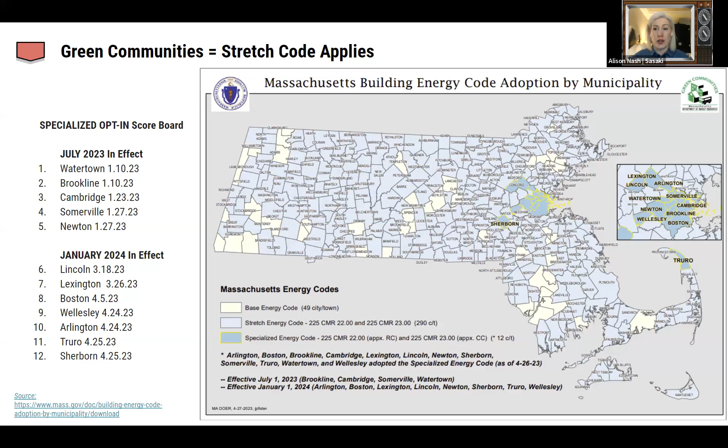However, it is important to know that the stretch code, the basic stretch code, does apply automatically across most of Massachusetts. There are only 49 municipalities or towns that are not green communities in the state. So really, it's important to note that the stretch code in its new form really applies to almost every type of project in Massachusetts, which is different than before.

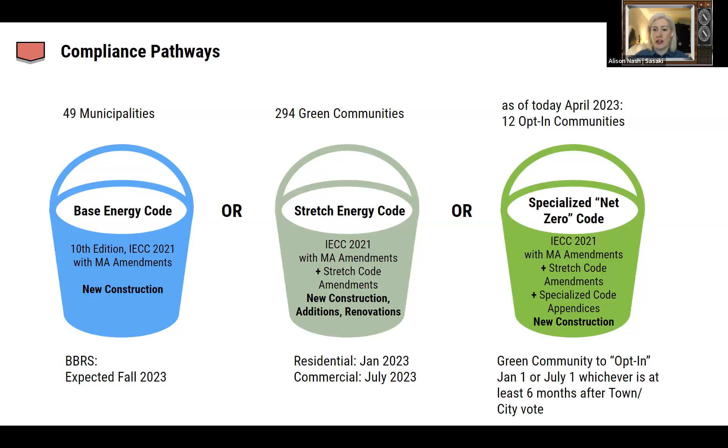And how does this work? So the base energy code, we're expecting the BBRS to implement that in the fall. We're still waiting on that final date of when that will be. The base energy code and the 10th edition will be released. However, that energy code really only applies to the 49 municipalities that are not green communities. The rest of the state will either follow the stretch energy code or they'll have the overlay of the opt-in code in addition to the stretch code requirements.

And this is just another way to look at it. We have the IECC 2021, which served as the model code. The base code is adopted from that, and then there's some Massachusetts amendments that'll be coming out as part of that. However, most of the state is going to follow the base and stretch code, with those 12 communities, and we anticipate more having to follow the opt-in code.

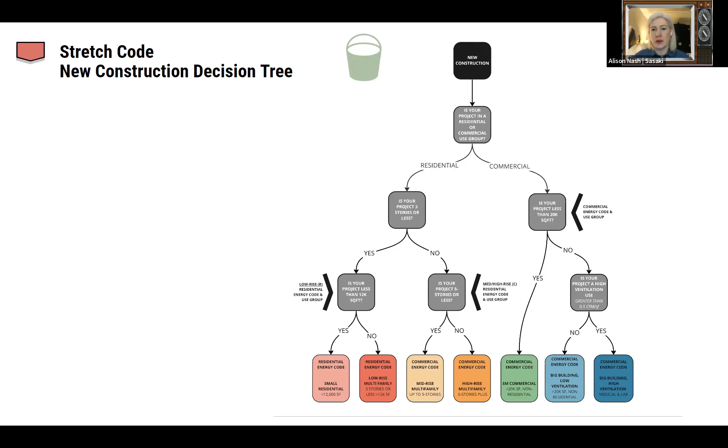So how do we know what this applies to? We've used this decision tree that was put together by a few of the Boston area sustainable design leaders, and it really helps you understand, if you're a residential or commercial project, how does that apply?

For the TEDI pathway, which we'll go into in more detail later, it applies to specific use types of buildings. So if your energy use type is a dormitory, fire station, library, office, school, police station, post office, or town hall, TEDI is a pathway you can use. There are other pathways too, but TEDI is a strong pathway for these particular use types, and it's optional for other use types.

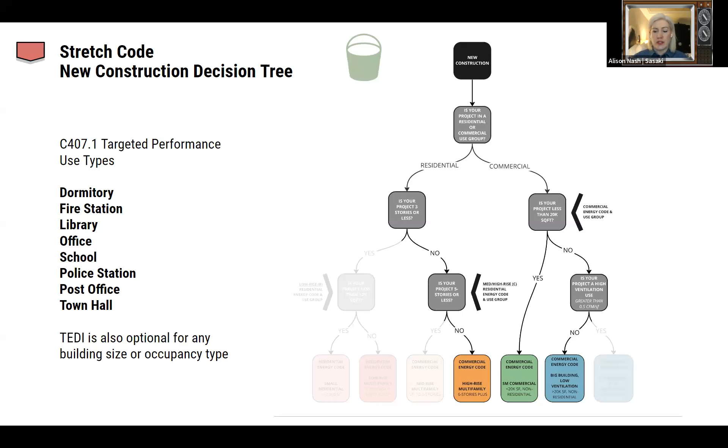So diving into the timeline and when this applies, and a little bit of background. The technical guidance documents were released last December. In January, the residential stretch code became effect, and that's when some towns and cities started voting. Brookline, Cambridge, Somerville, and Watertown adopted the opt-in specialized code quickly, and we now have an additional 8 cities and towns where the opt-in code will be in effect in January 2024.

This summer, the commercial stretch code will be in effect. We have a talk on that later this summer. We also anticipate that the base energy code is going to happen in July or the fall. In January next year, the opt-in stretch code multifamily for less than 5 stories will be required to meet passive house.

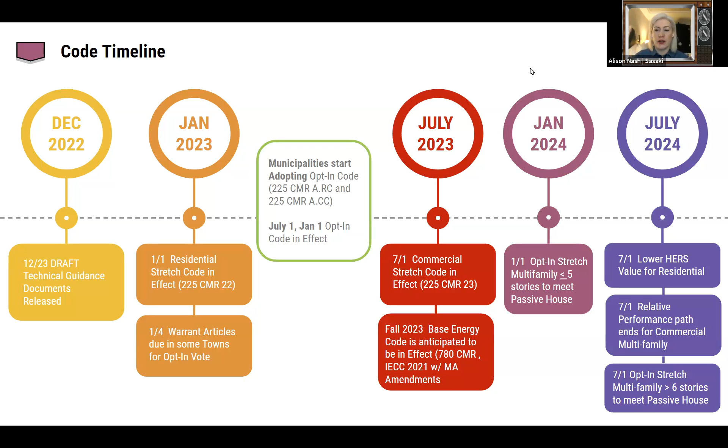And in July next year, there'll be a lower HERS value required for residential. The relative performance path will end for commercial multifamily, and the opt-in specialized code for multifamily greater than 6 stories will be required to meet passive house.

So in Massachusetts, decarbonization is now law. The recently adopted stretch energy code and specialized opt-in code take a leap forward in decarbonizing the built environment. And we see this through the introduction of some new metrics for building performance.

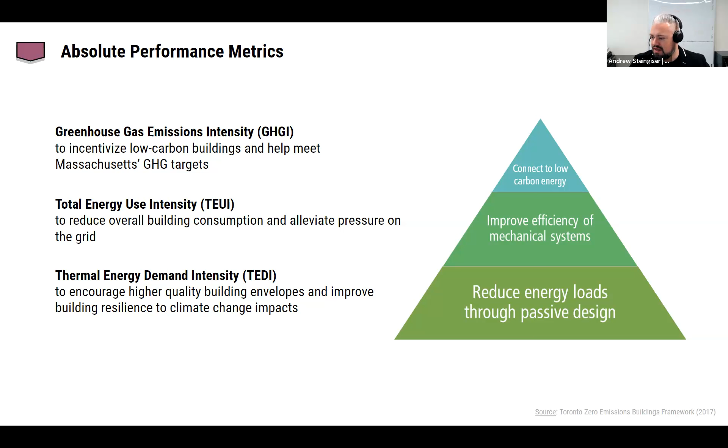So the code is moving towards absolute metrics rather than percent-better-than approaches like we've seen in the past. Through enclosure improvements like those required by TEDI, we reduce energy loads and mechanical loads. With reduced mechanical loads, we can reduce the size and energy use of mechanical systems, therefore lowering the total EUI and operational greenhouse gas emissions. Then we can lower the greenhouse gas emissions of the building, requiring less renewable resources to offset the remaining greenhouse gas emissions. So now the code is moving towards these absolute metrics, some of which include passive house and TEDI.

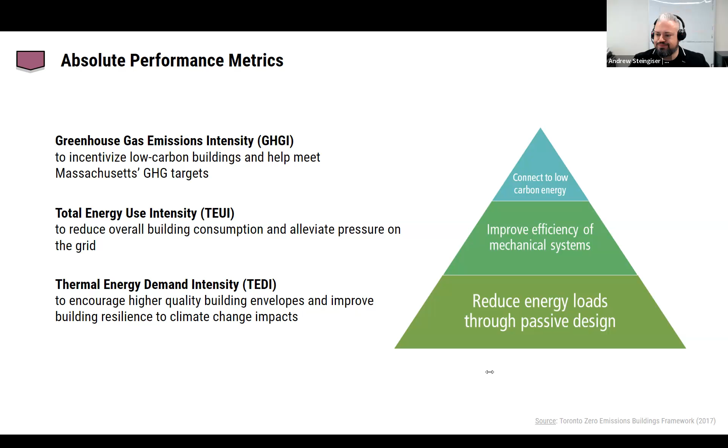So all the code paths are looking more at whole building performance now. We're all familiar, well a lot of us are familiar, with passive house at this point. Passive House is a compliance path for all buildings. Other paths in the code implement various elements of Passive House through multiple code requirements in different sections. This includes things like building enclosure improvements, air tightness, and heat recovery ventilation.

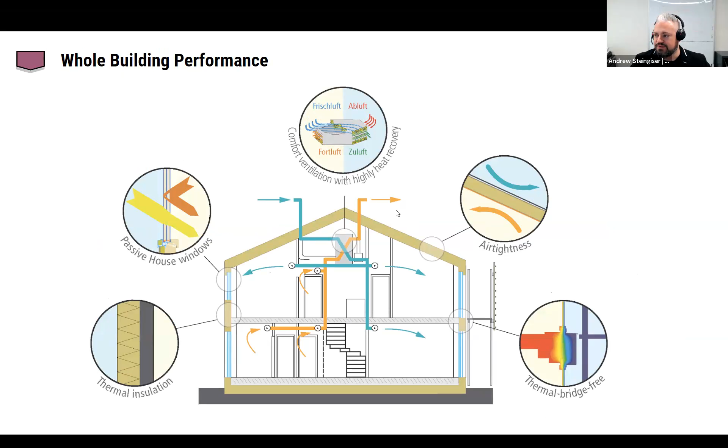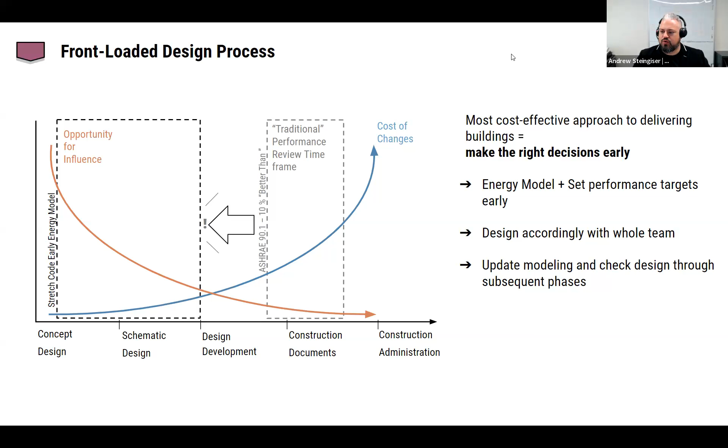So what this does for us with some of these new code requirements is it really shifts the design process. We have to make the right decisions early in the process. The new code requires early phase energy modeling right up front to set design targets that then are followed through and verified throughout the design process.

Versus the traditional time frame where we design the building, take it through somewhere in DD, there's an hourly energy model to check if it's 10% better than ASHRAE 90.1. This is how we did it in the past, and then usually it worked and we proceed through permitting. Now, with the metrics in the code that are there, it really relies on hitting these set targets. So you want to know upfront if you're hitting that target, and then what modifications need to be made in order to hit that target right out of the gate.

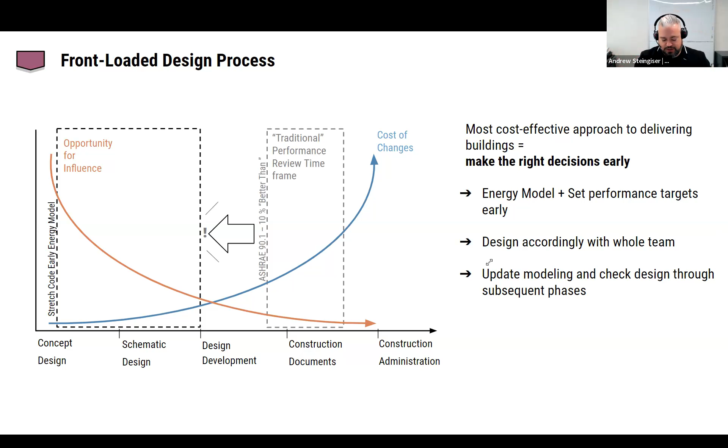So we're going to start talking a little bit more about the compliance paths in TEDI. There are essentially 4 compliance paths in the commercial code. Today we're just talking about commercial, so that's commercial buildings and residential buildings over 3 stories. There's a prescriptive path, which is 20,000 square feet, and it's what it sounds like—prescriptive components for envelope and mechanical, electrical, hot water, solar ready, EV ready, et cetera. And then there's 3 modeling paths. There's the TEDI path that we're going to focus on today.

That's the targeted performance path. There's a relative performance path, which is a little more on what people are used to with ASHRAE modeling and Appendix G. Then there's a certified performance path, which is getting certification through Passive House or HERS.

As Andrew mentioned, it's really focused on all of these paths being equal. That is the intent of this code, whether you are required to do a different path or choose one of the optional paths for your project, you're really designing towards passive principles for your project.

With the TEDI path and the relative performance ASHRAE path, there are prescriptive components that you would see in the small project prescriptive path. You'll see those prescriptive components also applied to those two modeling pathways. Certified performance, those prescriptive paths are essentially embedded in those systems already, whether it's PHIUS or PHI or HERS rating.

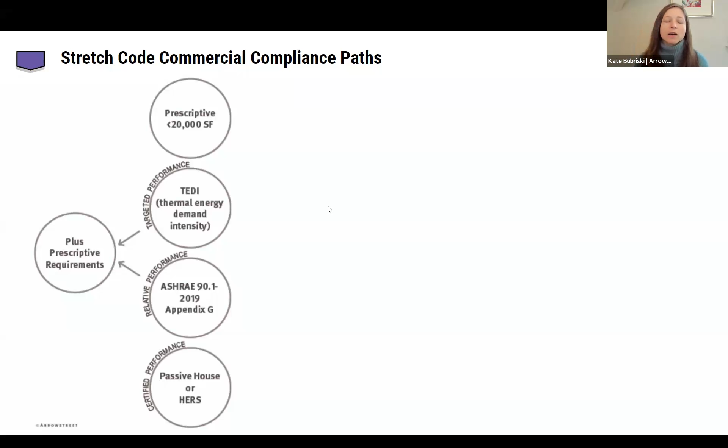So what kind of projects are required to meet these different paths, or which ones are optional? Prescriptive is for buildings under 20,000 square feet that are non-residential, so no residential projects can follow that path. It's technically optional because you can always choose to have a small building and do one of the modeling paths instead, but most projects probably will go for prescriptive if they fall in that under 20,000 square feet.

When we start talking about TEDI, this is where you start to see requirements, as Allison mentioned earlier, for specific building use types: dormitories, fire and police stations, libraries, offices, K-12 schools, post offices, town halls, and after July 2024, residential projects as well are required to be in that TEDI path.

For the relative performance ASHRAE modeling path, it is optional for high ventilation buildings and basically anything that's not required to be in the TEDI pathway. So you can always choose to have a high ventilation building and design it to TEDI, but you can also choose a different ASHRAE path.

And then there's the certified performance. That again is optional for any building, and HERS obviously applies to residential buildings only. So whether you're required to be in the TEDI pathway, you can always choose to go to Passive House or HERS pathway for your project. But if you don't decide to do the certified performance, then you are required to be TEDI if you fall in that sort of green color use types.

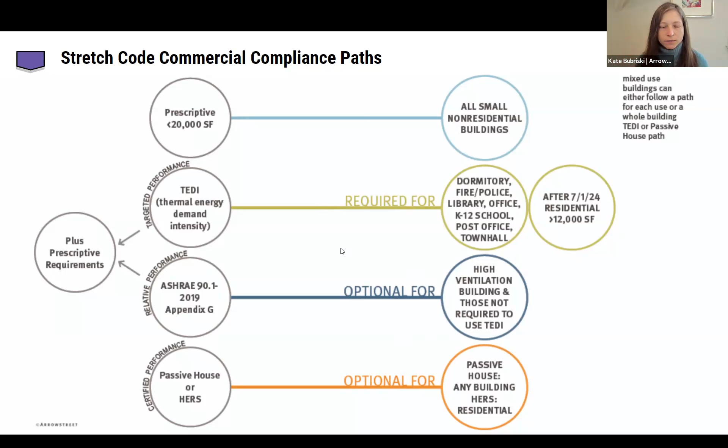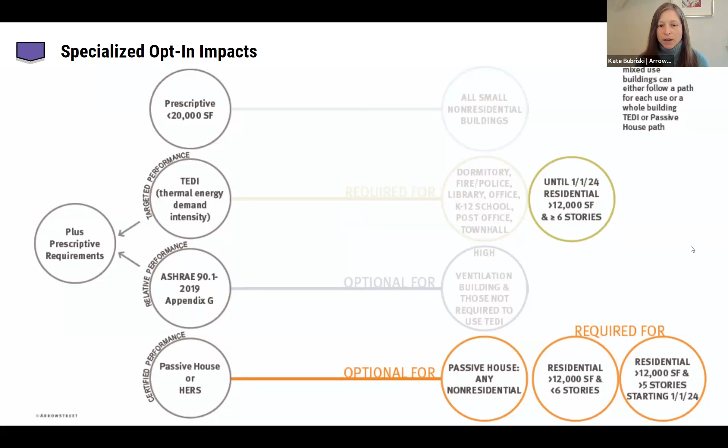So when we talk about opt-in codes, as Allison mentioned, it's really an overlay on top of the stretch code. There are some impacts if you're in a specialized opt-in community of what pathways are going to be available to your project. The main changes here are that Passive House becomes a required pathway for residential projects under 6 stories or over 5 stories, depending on the start date. That means the TEDI pathway goes away for those residential projects after January. So the main difference is that residential projects will have a requirement for Passive House - they won't have an option between TEDI or Passive House in the opt-in communities.

So what is the targeted performance path? TEDI, which stands for thermal energy demand intensity, is the modeling component to this performance pathway, in addition to the prescriptive pieces that are required. It's really looking at your annual heating or cooling demand, measured in kBtu per square foot per year, similar to EUI, but it's very different than EUI. EUI is looking at your total energy use, including everything from heating and cooling, but plug loads and other load sources. We're really just looking at that annual heating and cooling demand.

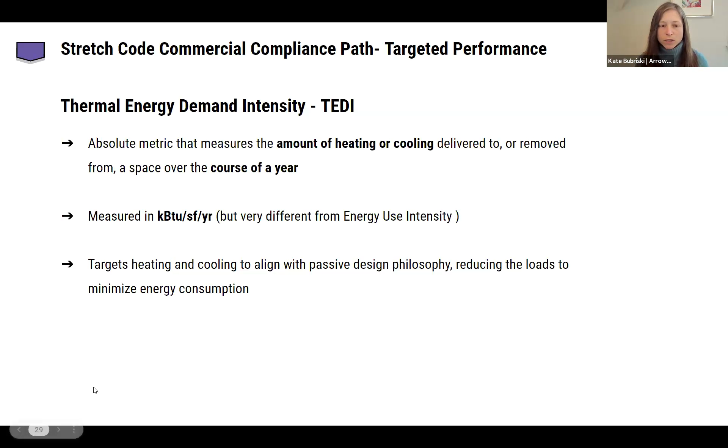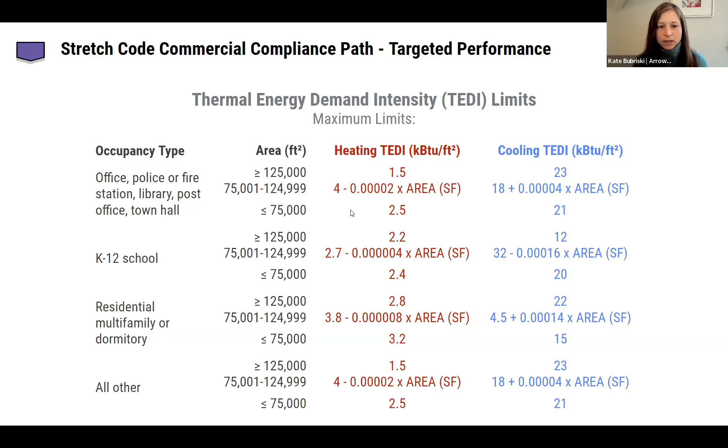In addition to doing the modeling and hitting those specific TEDI limits, you also have prescriptive components. We're not going to get too much into those today since we'll have a whole building envelope session in June. But I want to point out that for this code, applying to the prescriptive path, the targeted performance path, and the relative performance path, there are absolute minimums you need to hit with your envelope.

It really plays into the TEDI modeling, as Ali and Andrew will talk about more, because these are minimum requirements, and you might have to adjust them in order to do the modeling process that goes along with the targeted performance path.

So there are requirements for the U-factor of your walls. There's some allowance across all your envelope components if your above-grade wall doesn't hit the required U-factors or fenestration-to-wall ratio, and based on that, there are other requirements to do a component performance calculation.

There's de-rating for thermal bridges, which is fairly new in this code and requires much more focus than before. There's also mandatory air leakage testing, and things like solar-ready and EV-ready requirements.

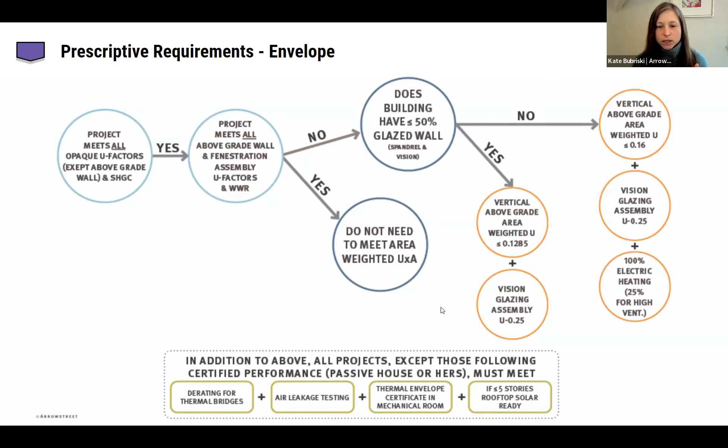One of them is the air leakage testing, which has to be a third-party test. There are different requirements depending on the project, whether it's an R or I group or others, but this is required across all projects in stretch communities.

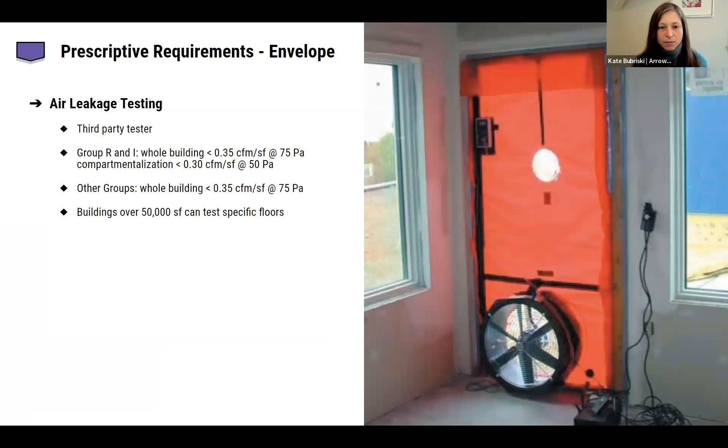So Allie's going to talk about the modeling piece.

Thank you, Kate. So in order to prove compliance, we're going to have to do what we're calling TEDI modeling. To be clear, the heating and cooling TEDIs - the heating and cooling demand for a particular building - can be extracted from any energy model.

You could go into any energy model of your existing building and take that number. However, under the new Massachusetts stretch code, the energy model used for compliance, which we're calling from now on the TEDI model, must follow certain DOER modeling guidelines. What this means is that your TEDI model will not necessarily be equivalent to what you're used to as your proposed model.

I do want to note that the new code does not require you to do a proposed design model, but you might still choose to develop one for purposes like quantifying EUI, understanding how much PV you need to get to net zero, doing LCCA analysis for LEED compliance, et cetera.

I anticipate that most projects are going to have a proposed design model, but you are not required to do that by code.

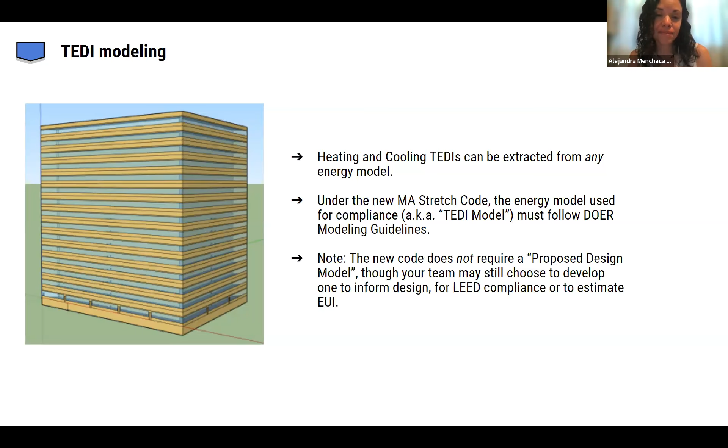These targeted performance simulation guidelines - many of you might have already read the original draft and then the updated draft that were published recently, in the last five months or so. There's an updated draft incorporating a lot of comments from the modeling and design community in reaction to the original drafts.

Those are coming, my understanding is, anytime in the next couple of weeks. So I want to clarify that there's a lot of guidance we'll be giving here. We've been given access to the red line of the final modeling guidelines, but those haven't been publicly released, so we're not necessarily going to address specific details since we don't know the final version either.

So what does it entail to do the TEDI model? This is important for modelers, architects, and owners alike to understand how things change.

How is this TEDI model different from my actual model? The TEDI model is an energy model. It's using roughly the same software that was being used before. It is the same or it's equivalent to the proposed design.

It matches the proposed design in its massing, its window to wall ratio, enclosure thermal performance, so R values, U values, air tightness, ventilation heat recovery, HVAC system and zoning. You are allowed to use the default HVAC system and zoning too within the guidelines, but in principle, if you have a proposed design model, you could just take what you have and then start from there.

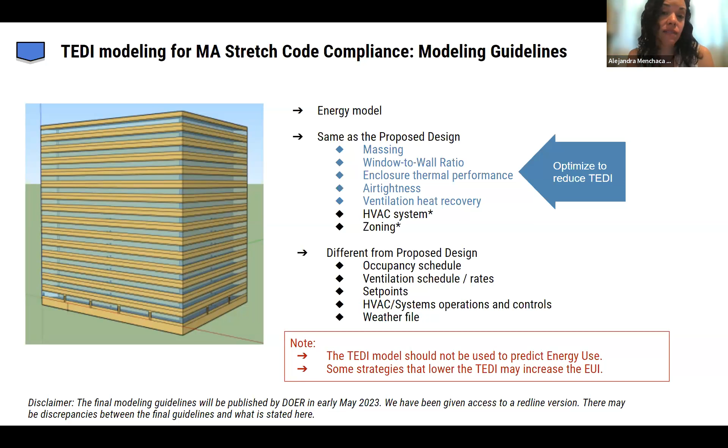Some of those strategies could potentially increase your EUI. And because the TEDI model is not reflective of your EUI, if you want to understand if there's an impact to EUI, you would need to have a proposed design model to understand that. So while it's not required by code, it's probably a really good idea to have it. We go to the next.

As a reminder, this is what the thresholds you'll be aiming for look like. Don't pay too much attention to the equations, but basically if you are office, police station, etc., the first category, your heating TEDI will have to be anywhere from 1.5 to 2.5, and your cooling TEDI will need to be anywhere from 23 to 21, depending on how large your building is. So you'll really be using your model to fit within this absolute threshold.

And if you're designing 5 different libraries, even though they're very, very different and their massing is completely different, all of them, if they have roughly the same square footage, will need to meet exactly the same value. So as Andrea mentioned, we're now in an absolute metric. We're not in a relative metric where you're compared to a baseline that's unique to your particular building.

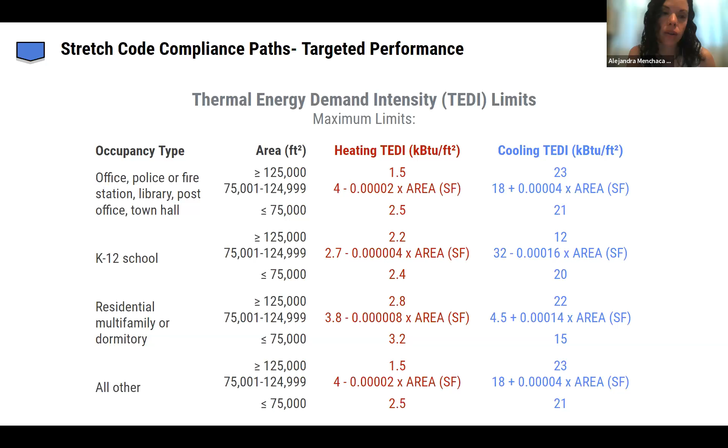So just to close in terms of energy modeling, this is a comparison of what is changing with the 2020 stretch code and before. It's not uncommon to do the Massachusetts baseline model around DD or later, even backstop envelope calcs anywhere around DD or later. Some of us are doing them earlier, but it's not uncommon to see teams really starting to do this at DD or later.

With the new stretch code, the answer is as early as possible for everything, right? In our experience, achieving the TEDIs can be quite challenging, and so fine-tuning the design is extremely important to be doing very early on. Whenever you can kick off, if you're writing or reviewing a scope for modeling and it says the code model will start in DD, that's a red flag. You should really be starting as early as possible, as well as your backstop envelope calculations, and you need to make sure someone has that scope and is advising you on that.

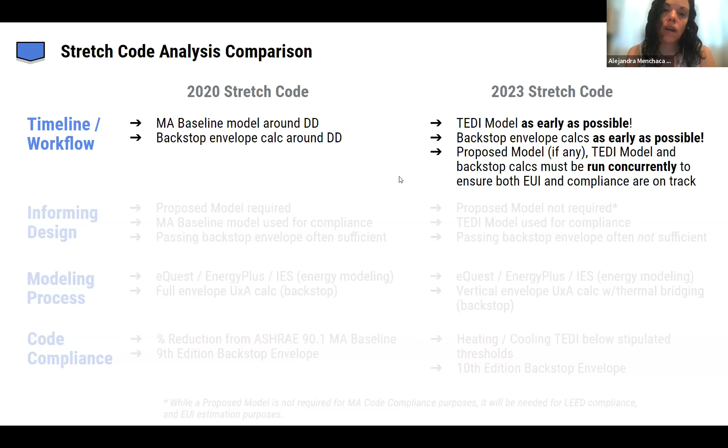If you have a proposed model, as well as a TEDI model and backstop calcs, you should be running those concurrently anytime there's a major design alteration, just to make sure you're keeping track of your compliance. But also, if you care about EUI and say you have an agreement with the utilities and a particular EUI cap, you're aiming for 25 or whatever it is, you need to make sure everything you're doing meets TEDI, meets backstop, and meets your EUI goals. So do all three concurrently.

With the new stretch code, as I mentioned, you don't need a proposed model, but it's highly encouraged. You're going to be using the TEDI model for compliance, and this is very important: passing the backstop envelope is often not sufficient to meet the TEDI. What does this mean? You can't just do the backstop calc and say, okay, now I know I need an R value of X and a U value of Y, and my window-to-wall ratio is this, and I'm good. No, backstop envelope is becoming more like a minimum requirement and minimum compliance, but you still need to do the TEDI model and you might need to improve on that.

Some other examples: your infiltration, your air tightness, will need to be lower than the 0.35 that Kate pointed out as the minimum compliance. If you're just following minimum compliance with 0.35 CFM per square foot at 75 pascals, your TEDI might not pass. Your TEDI model might not pass, and so you might need to have a higher air tightness. Again, I can't stress it enough, running the TEDI model as early as possible is key.

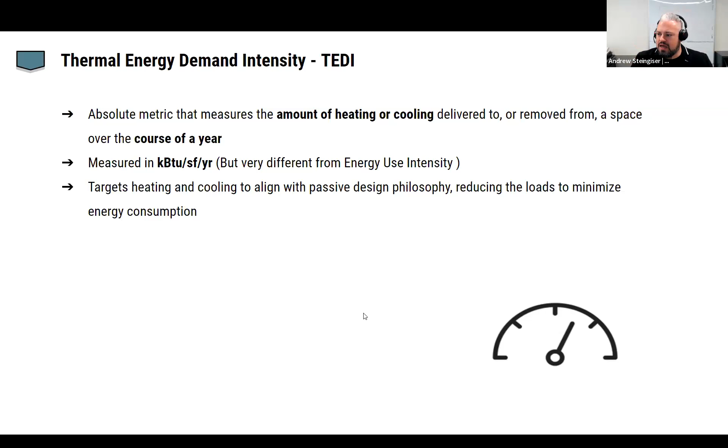So some of these key levers go into the energy budget that help us towards our TEDI model. Before we even get started, the building's massing alone can impact how much heat is lost through the enclosure. This can influence TEDI before we even touch the R values or U values of the enclosure. More complex shapes or over-articulating the building massing can increase the envelope area, which compared to the volume becomes less efficient. Having an efficient form factor - the measure of the area of enclosure to the areas of floor plates, or surface to volume ratio, two separate metrics that look at a similar thing - having a more efficient form factor and reducing the envelope area relative to the building volume will make it easier to achieve reduced heat loss.

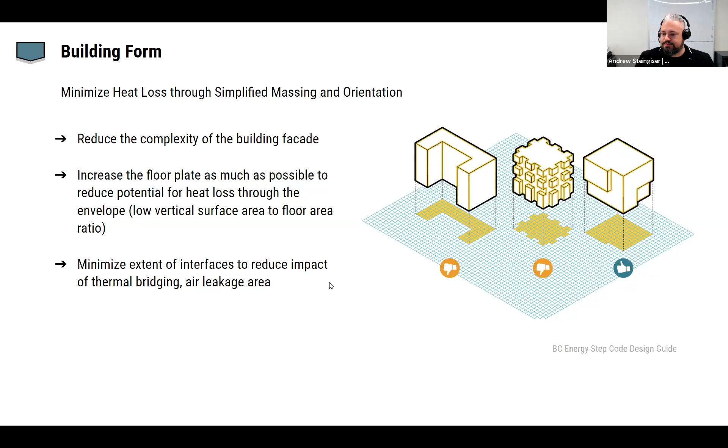So, another one of those key levers is the glazing system. Moving forward, if we choose to use a lot of glazing, it will have to perform really well. We want to minimize heat loss through it, so we may have to be more selective about our glazing design priorities within projects. Mullions are the worst performing part of a glazed system, and so having more glass relative to fewer mullions within a system will perform better than a system with many mullions. That's something to be looked at carefully when running the UA for the enclosure - it can really affect that installed U value of that glazing system that goes into the TEDI modeling.

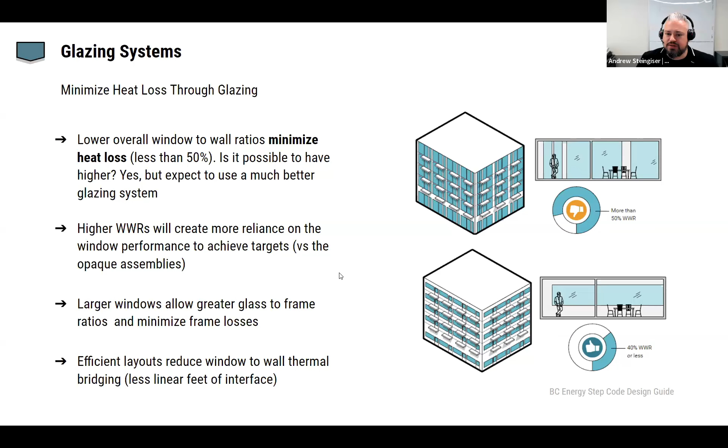Another factor related to glazing is the solar heat gain. If you follow the component performance alternative requirements for glazing in the code, section C402.1.5, you're going to be starting off on a pretty good path towards your TEDI model inputs. Of course, you have to run that model and see for your project what your specific enclosure requirements are, but that's already a good start.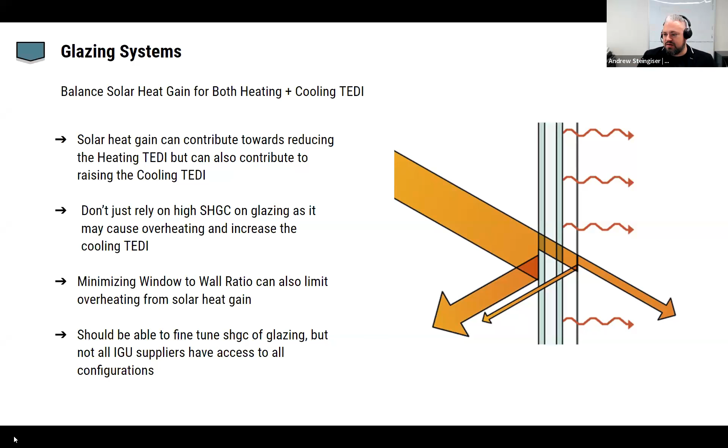And the enclosure performance is confirmed through the energy model, but the goal here is to balance the solar heat gain to satisfy both heating and cooling TEDI. The heating TEDI limit in this climate zone may be the more challenging target - there comes a point where you're pushing that down and maybe the other one goes up. So it's a balance. Of course, you don't want to rely wholly on your solar heat gain coefficient in the glazing - you might limit the percentage of glazing before you do that. Again, it's a balance of all these things towards getting your model inputs to yield your result, hopefully under your TEDI limits for heating and cooling.

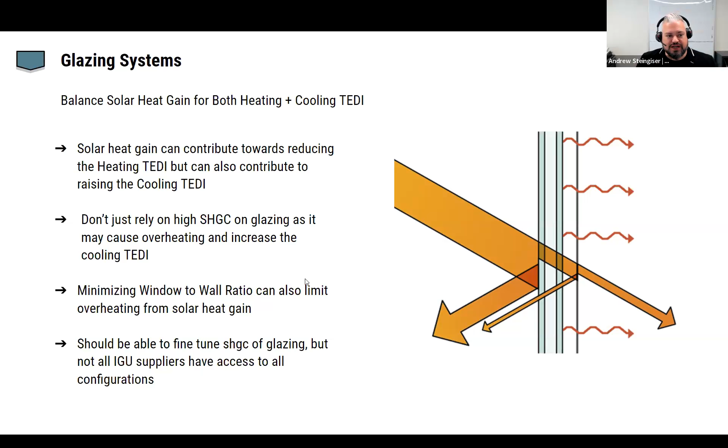As Ali mentioned, there's a lot more accurate accounting going on for what goes into the inputs for the TEDI model now. So again, the goal is to more accurately predict performance of the buildings and to make them better. We do this with an enclosure performance target.

That target may be project specific per the TEDI modeling. What is the heat flow when enclosure elements aren't floating in space? It's a question we looked at in little pieces in the past. This is more accounting for the heat flow through the whole building, including interfaces of assemblies.

We look at this through points and lines, the Chi's and Psi's, and the enclosure is derated as described in the code to yield a clear field R value that more accurately reflects the heat that's actually being lost through that assembly.

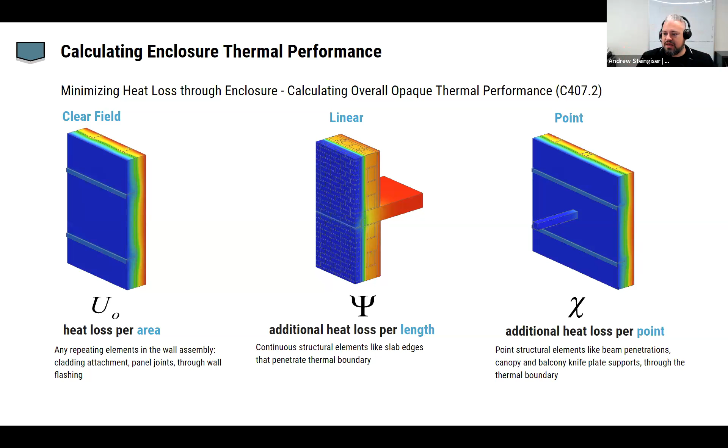So you do this for opaque walls, and you also do this for glazed systems. For glazing, the code requires limits through section 402.1.5 on the glazing area weighted U values. And the code requires either 2D or 3D finite analysis now - those therm or Flixo models we've seen in the past - and code specifically requires 3D finite analysis for curtain wall spandrels, most of them, because it requires 3D analysis for anything with multiplanar heat flow.

Like this example here, a recent curtain wall system with custom system we looked at, even with all the thermal breaks and mullions that don't go all the way through the back pan and all this insulation, we found a clear field value of R9. And you see through the heat flux that in 3 dimensions there's a lot going on beyond a simple 2D cut where heat flow occurs. So that's the idea with multiplanar heat flow.

There can be large discrepancies between 2D and 3D modeling, and we caution relying on 2D unless it's really clear how it's being carried out, or if it's a clear-cut case where anything beyond that 2D cut is extruded beyond. This is critical, particularly for TEDI energy modeling, that there's not an overly optimistic accounting for clear field R value.

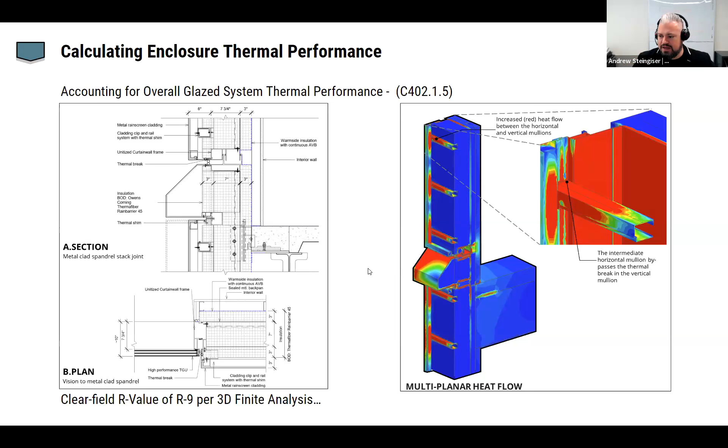A little more on glazing systems - the code requires that we be consistent in our accounting for gains and losses through the enclosure, and that includes for glazing, the center of glass, the frame, and the edge of the IGU.

It's kind of similar to what Passive House does too. NFRC and Passive House are ever so slightly different. Passive House also includes that sill install, the heat transfer through that flanking condition of the window rough opening. NFRC doesn't so much look at that, and that's not something that's going into the TEDI model necessarily - it's just the glass, frame, and edge.

But it's simply not your center of glass U value - it's accounting consistently for this, and again, the frame is generally the worst performing part. So we have to look carefully at the design and the layout of the mullions.

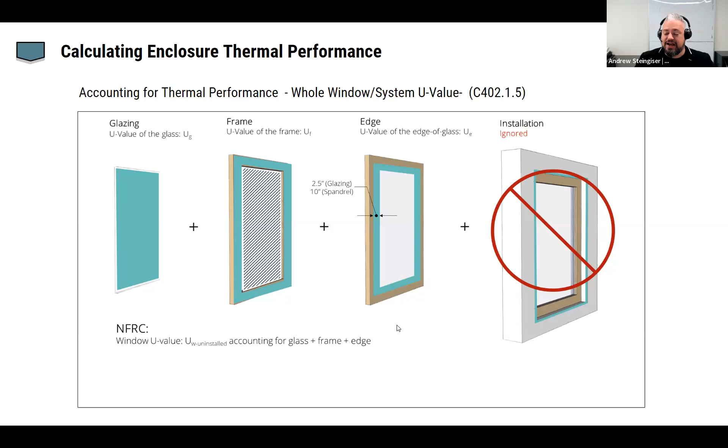So in the code now, there's also air tightness requirements, and for those of us familiar with Passive House, that's nothing new, but it's making its way across all code compliance pathways now too. And the goal is to achieve the modeled air tightness in the actual building. TEDI is counting on a certain air tightness in the model, and we want to make sure that's achieved in reality through construction and operation.

So the best defense is to carefully detail the enclosure, particularly at transitions between assemblies. We're not leaving this to last minute in the field - we're being proactive through design, looking at the enclosure and the detailing, which often ties into the larger design. There's more than one way to skin a cat, so we want to look at the most ideal way from the get-go if we can.

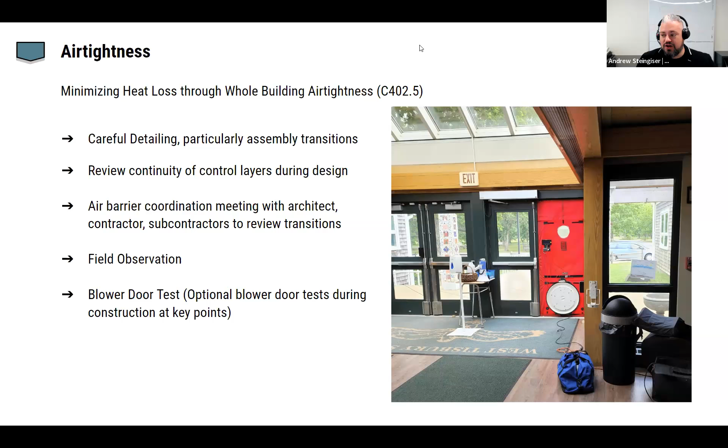In construction, collaboration is necessary with the GC to make sure all trades touching the enclosure are clear on air tightness priorities as well. So there's that step between carefully detailing, making something feasibly constructible, and then clearly communicating that to all parties, and then careful field observation through construction helps catch potential enclosure deficiencies all the way along while they're still accessible before your air tightness test.

The code defined limit is 0.35 CFM per square foot of the enclosure at 75 pascals, so it's relative to the amount of enclosure you have - similar to what PHIUS does in Passive House. To note, their air tightness requirement is 0.08 CFM per square foot at 75 pascals, 0.08 versus 0.35 across the code. So it's still not quite as stringent as what Passive House would require, but it is a major improvement upon what we've seen in the past.

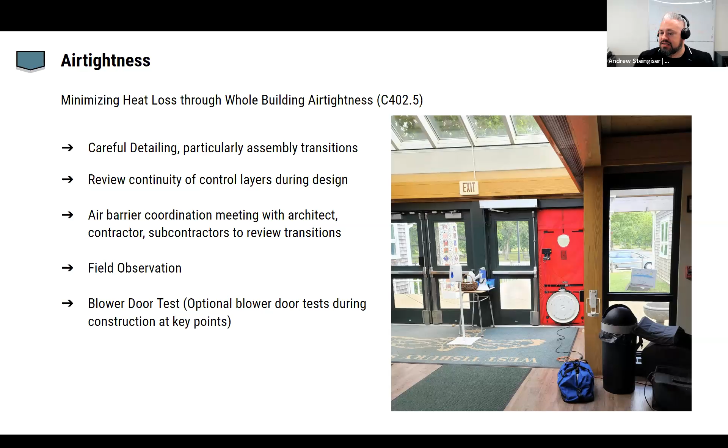As Ali really drove home, it's important to set design targets early with an early phase energy model. This will inform things like the efficiency required from the heat recovery ventilation, which is also now a code requirement. That's a factor that goes into the TEDI modeling as well, the percentage efficiency of your HRV or ERV. If that model is done early in the process, you know what you have to achieve for percentage efficiency from that equipment.

This will inform early phase cost estimating as well, as being able to identify what is available for use in that particular project. If the efficiency required proves problematic in the modeling versus what equipment you can get on the project, another key lever can be pulled, but it's going to make certain requirements more stringent in one of the other areas to balance that energy budget.

Unlike the design of the enclosure, there's only so much you can do with the efficiency of ventilation, so at some point it maxes out. It's really important to consider ventilation in balance with all the other key levers in the project, including enclosure, based on that modeling. Next.

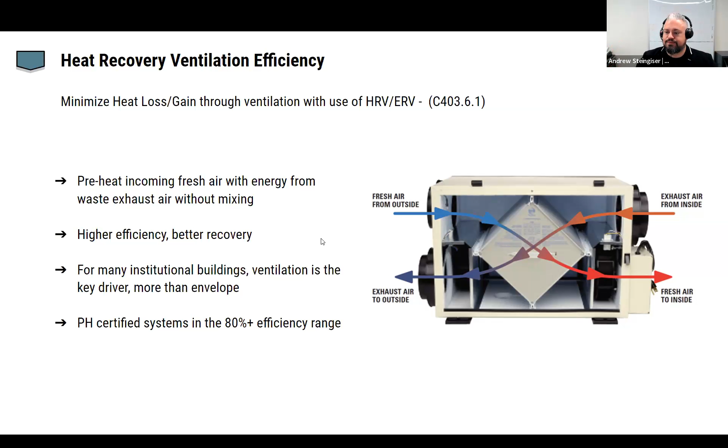All right, so we just went through a lot of very technical information, and there's some excellent questions in the chat. But first, before we get to the questions, I just wanted to show you all our resources screen, which I can leave up during Q&A for some of it.